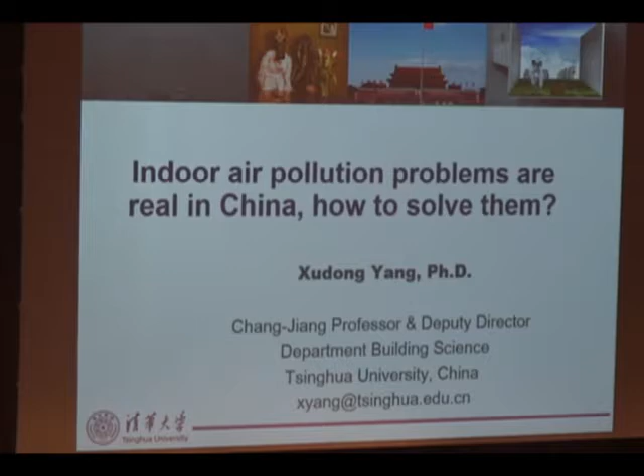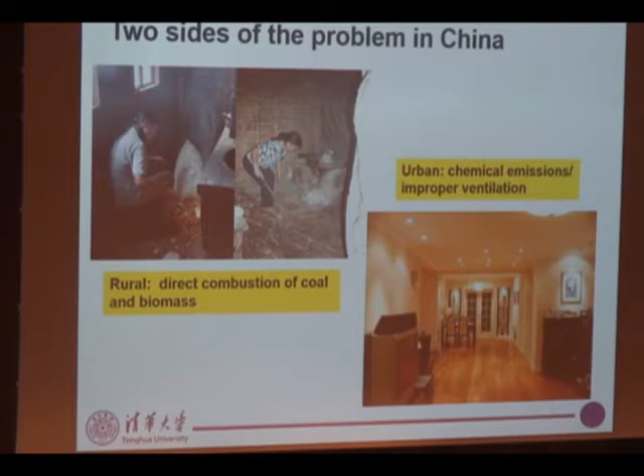I want to overly simplify this as chemical emissions or improper ventilation. So the exposures are different, and now recently we also have this new evil like the haze, or outdoor air pollution. This adds to the complexity of indoor air pollution.

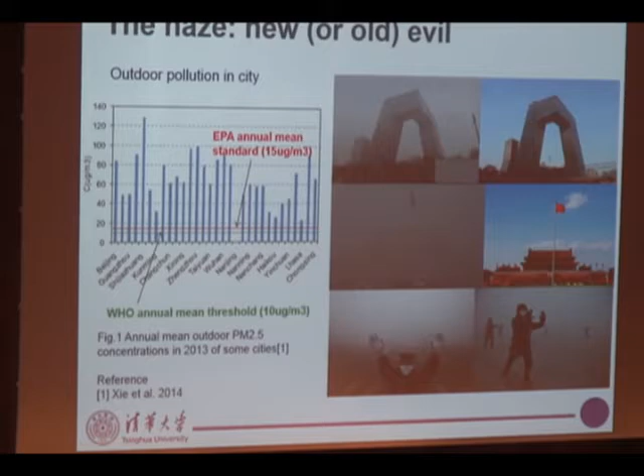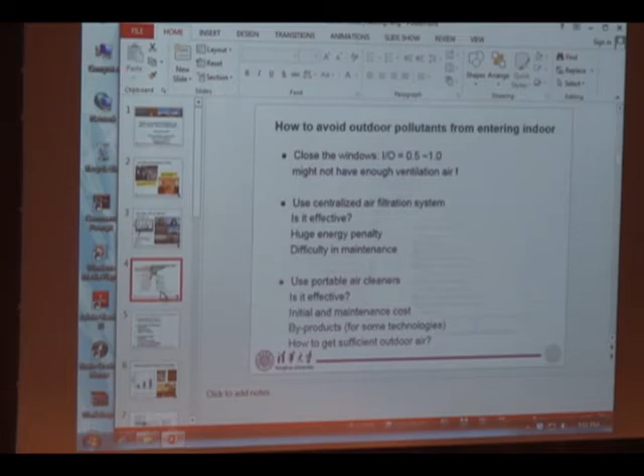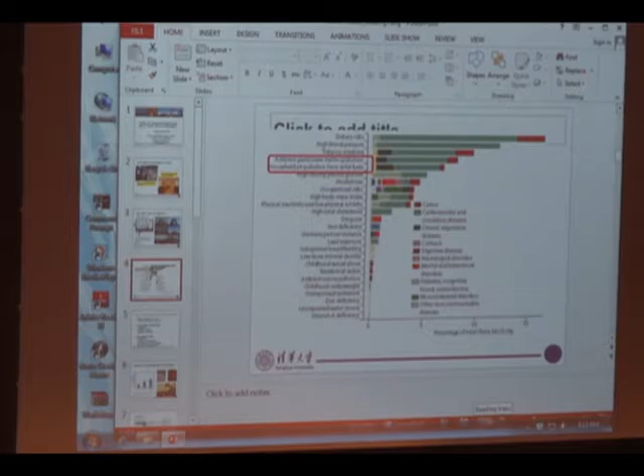And the household air pollution from solid fuel also ranks very high.

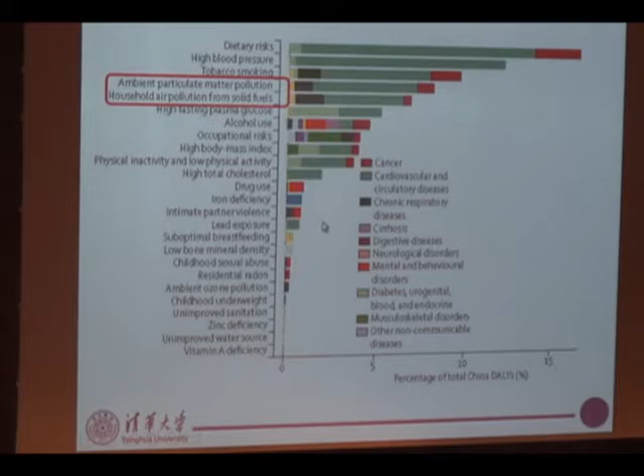So first of all, if we want to prevent the ambient pollutant from entering the building, there are some solutions. For example, if it's very polluted outside, then you close the windows. That can help a little bit, but may not - it really depends on how much air is getting in and how well the buildings are sealed.

People have also talked about using air cleaners, whether centralized air filtration or portable air cleaners, and there are a lot of discussions and concerns about that. So these are obviously possible solutions.

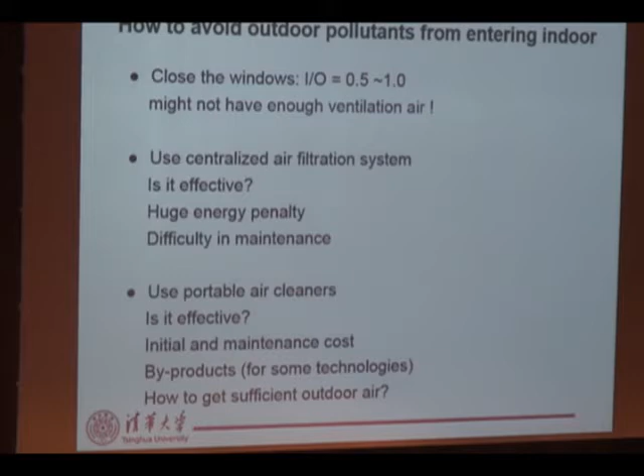But I want to focus on indoor-generated pollution control. Let's first look at the pollution in rural areas.

Based on our measurements, and a lot of evidence, when people use biomass or coal to heat, cool, cook, the particle concentration gets to a very high level. And not only that, but the indoor particles can get outside and also make the outdoor air quality very bad.

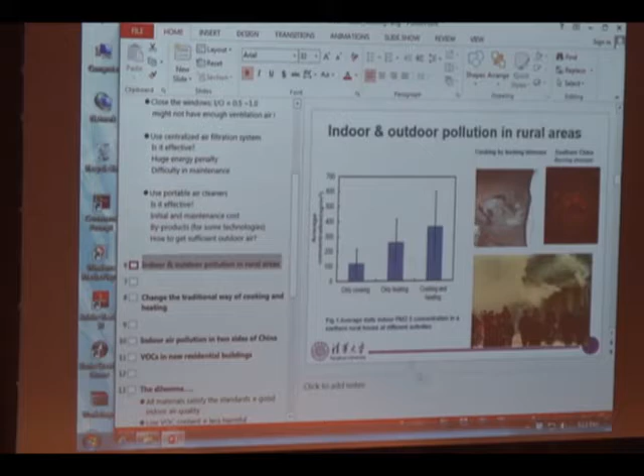Sorry about that. Should I use this one? This is forward. This forward, this back - this is forward, right? Yes, this is back. Okay.

So we are working on a retrofit or intervention idea, trying to solve the problem and to propose the so-called zero coal, low energy village concept.

Basically, to do this you need to consider different aspects. First, we need to make sure the buildings are energy efficient, with lower requirements in terms of heating energy. We need to improve the thermal envelopes, insulation, and also try to use passive energy. By doing this, we could probably save 60% of the energy.

Then we need to focus on the heating equipment - whatever equipment we are using, try to improve the efficiency. We are looking at 20% saving potential there. And then at the last, we only have about 20% of the energy left.

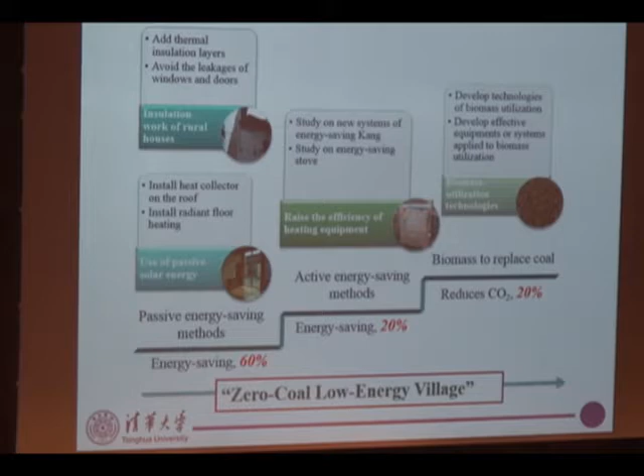So then probably we can get rid of the coal or raw biomass by using cleaner biomass, like biomass pellets. So this is the idea. Of course this is only one possible solution - there could be many other solutions available.

To do that, we need to really change the traditional way of cooking and heating. Traditionally, people use this kind of stove and fuel to do cooking and heating. We want to change this heating and cooking behavior - instead of using raw biomass, try to use biomass pellets, which is processed biomass that can burn at much higher efficiency and low emission.

And the same thing for the heating situation - instead of using coal, which generates a lot of pollutants, we try to use this kind of pellets.

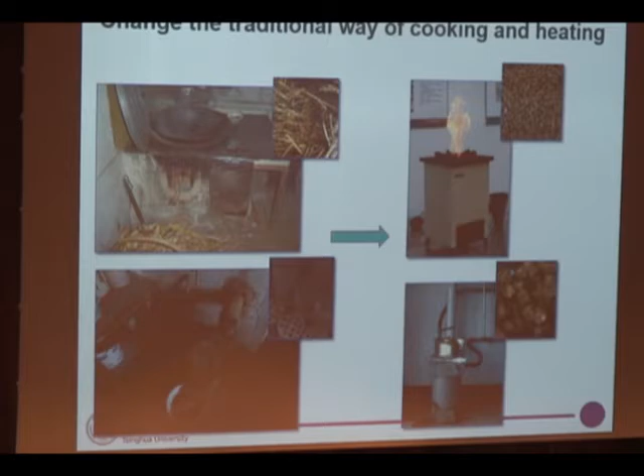However, to make this really work, there are a lot of issues that need to be considered - technical issues, economic issues, and also I would like to mention we need to consider users' preference and acceptance. If you provide them something and think it's going to work, but when you deliver it to their home and they don't like it, eventually they are going to throw it away, even though it's a free gift to them. They don't take it.

So basically, we are doing something that tries to consider their own behavior. What is their own behavior? They try to use their existing cooking facilities as much as they want - for example, the cooking pot.

So what we did was we tried to keep the same cooking pot, and just replace it with an insert, a so-called cooking burner, and put it inside their existing cavity, and then try to see if this is going to work or not.

Based on our very preliminary test, it seems like farmers like this idea. So we are doing different stages, from technology development to the laboratory emission test, and then testing it in our rural energy lab with a unique facility. We can mimic the household situation and try to find potential problems. Then we can do the pilot test to deliver it in several households, and if it works, we can do a larger scale implementation. This is a procedure, and we are at this stage right now, and hopefully, if this works, it can be another solution to solve the problem.

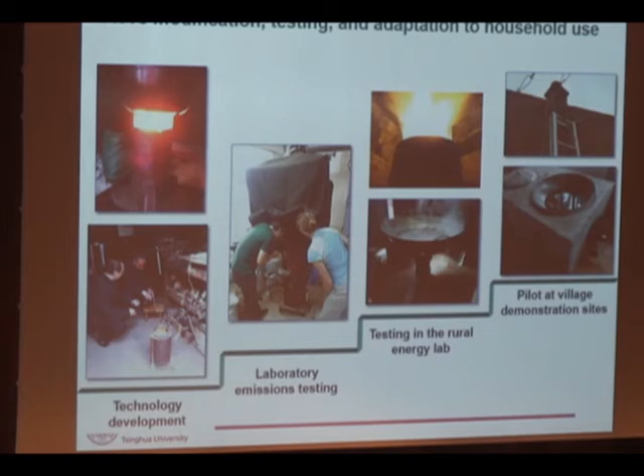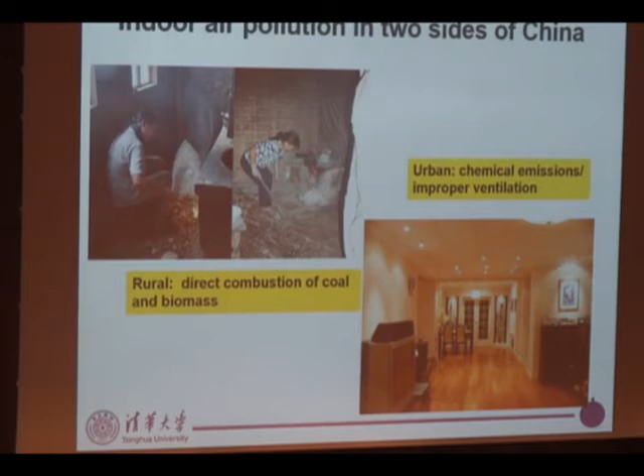So now I'd like to switch to this part of the problem. In the urban area, people are exposed to very different kinds of pollutants other than outdoor air pollution. There has been a lot of evidence showing that in urban residential homes, the volatile organic compounds or formaldehyde exceed the standard quite a lot.

Based on these many tests, more than 1,000 households tested, a very large percentage have shown the problem. Also based on the chemical measurements, we found that quite some percentage also exceed the guideline value in China. So the dilemma is...

We know that a lot of materials have standards and they meet the standards, but that doesn't mean they can ensure good indoor air quality. And secondly, we also know that less VOC content in the material doesn't mean it's less harmful.

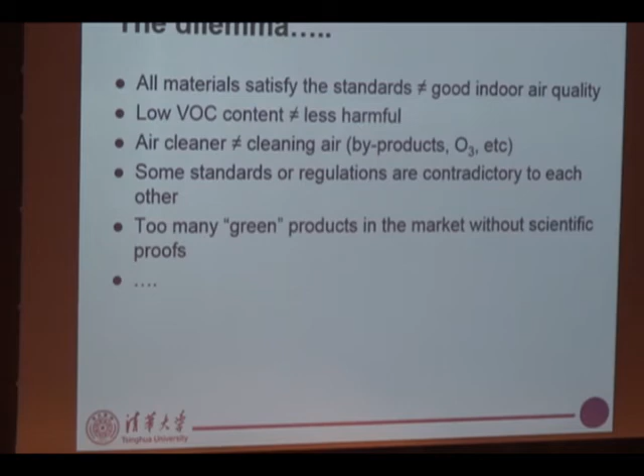So that's another problem. And also we found sometimes people use air cleaners. However, we know that sometimes they are not cleaning air, but rather they are polluting the air due to byproducts or ozone generation. We also found that some standards or regulations are really contradictory to each other. And we have found too many green products in the market, however, there is no scientific proof. So these are the real problems.

So what we found was there is a long list of research needs. The first thing, certainly, we need to work on fundamentals, on material science and physical-chemical processes, trying to understand the situation better. That's certainly important. However, the second one is also a very important issue: to try to monitor the air pollutants in a more cost-effective and more efficient way.

There is also a need for design tools, standard test procedures, databases, and new air cleaning technologies. You can come up with a long list. I know our chair is reminding me, so I will just quickly finish.

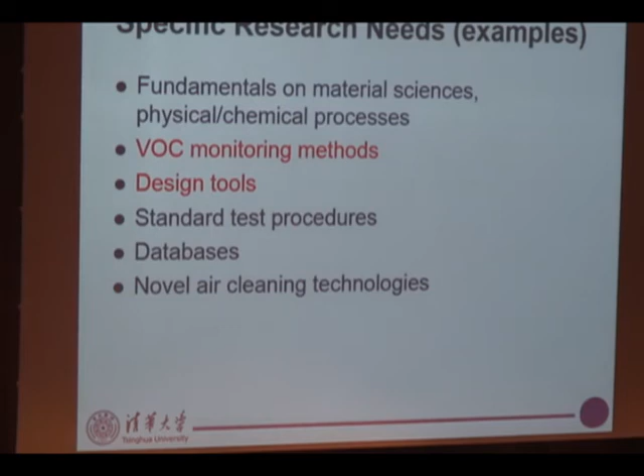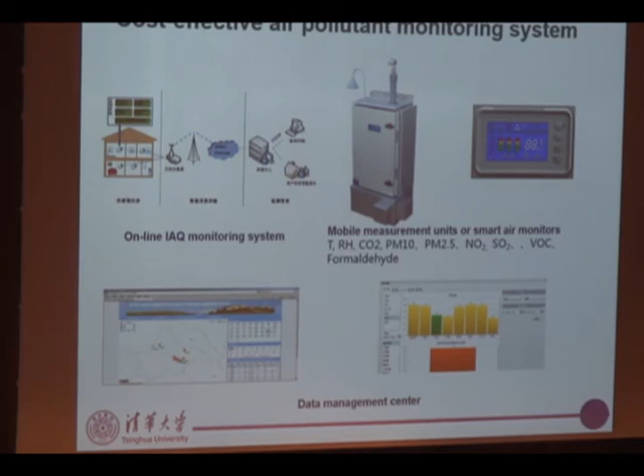The first thing I would like to mention is that there is a cost-effective air pollution monitoring system available. It can do online air quality monitoring, and send the data to a central station so you can have continuous monitoring of the situation. There are also mobile measurement units or smart air monitors available which can measure these pollutants in a very cost-effective way. However, you need to calibrate them, otherwise the accuracy may not be satisfactory.

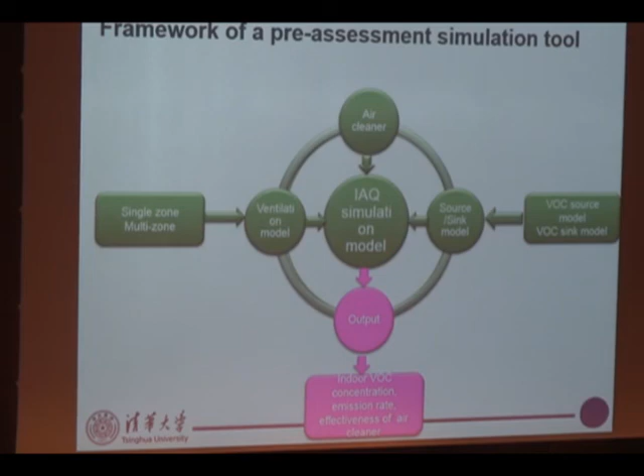Another work we have been working on is trying to develop a so-called pre-assessment tool to solve the problem before you implement. For example, if you want to do interior construction, you have a lot of choices of materials, and you can do a simulation and predict what's going to happen. If you find this is not going to work well, you revise your design and try to prevent the problem from happening in the first place. So that could be another possibility to solve the problem.

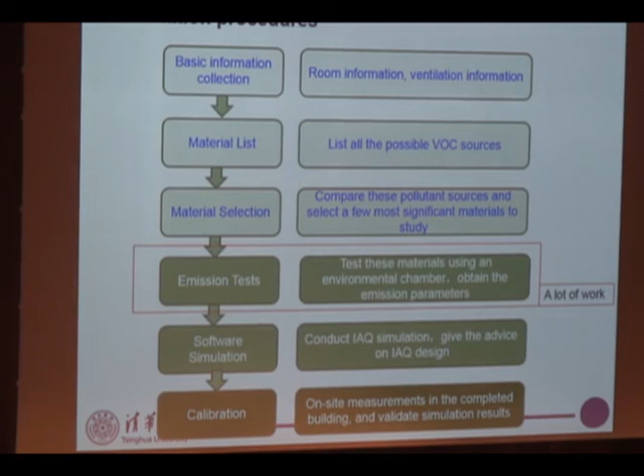Of course, this procedure needs a lot of effort. In particular, we need to do a lot of tests on the emission sources to get a database. That's a lot of work. As long as we come up with that, the simulation needs to be validated, and this could be used as a good design tool to prevent the problem from happening. So that's a very brief presentation. Thank you.